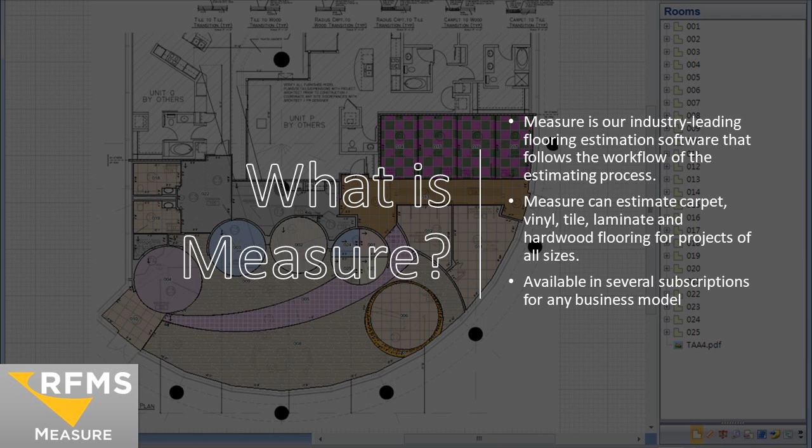If you're still doing hand takeoffs, the old-fashioned way, it gets it done, but the biggest thing with software is it makes it more productive and efficient. It's not necessarily designed to do it for less square feet or yards than you could do it by hand, but ultimately more productive and efficient, especially for any sort of changes that you'd have to do either on a builder side, homeowner side, commercial side, where they're replacing carpet broadloom areas with tile. That's why we feel it's time for people to make a change and kind of come into the 21st century, with a little pun intended.

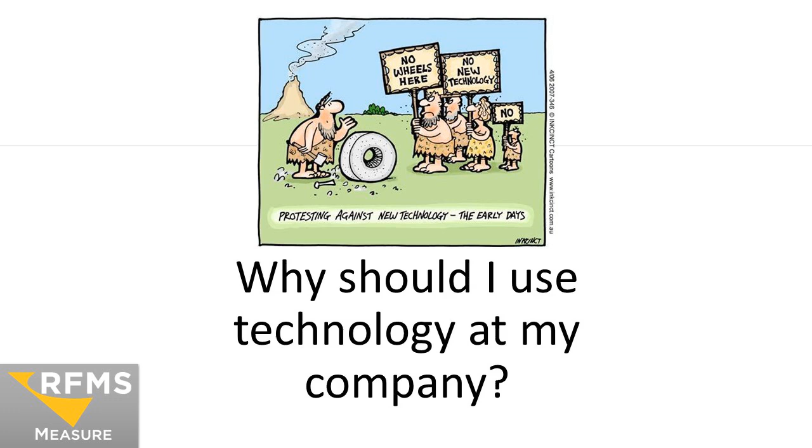Why should I use technology at my company? Well, it really makes it more productive and efficient, in my opinion. If I had to do takeoffs for a living again versus training people on how to do them, certainly I could go back and do them by hand, but I would certainly not be as productive or as efficient as some of my coworkers if they were using software. And I think our customers expect it. We live in a society now where technology has crept its way into everything from our homes to our cars, and it just makes sense business-wise and even estimating-wise to let that also be part of our day-to-day routine.

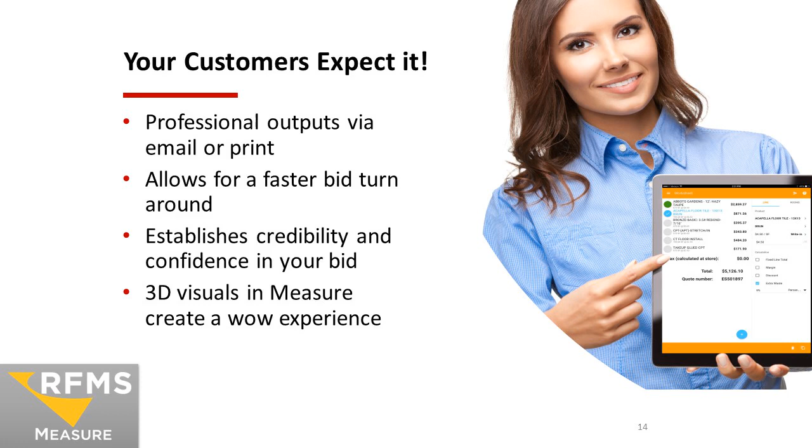Professional outputs allow for faster bid turnaround, establish credibility and confidence in your bid, and 3D visuals in Measure create kind of a wow experience, more of a sizzle, that could ultimately be used as a sales tool.

Your staff needs it. Technology allows your staff to do their jobs quickly and efficiently, grow your business without adding staff, and accommodate. As we mentioned before, hopefully this is going to make you more productive and efficient in the takeoff process. Takeoffs that used to take maybe a week for huge commercial jobs, even ones that took maybe 2 or 3 hours, you can certainly take that time down by using software. What new technology does is create new opportunities to do a job that customers want done.

Measure Premier is designed for commercial flooring dealers. It minimizes waste by optimally placing carpet seams and cuts. Keep in mind, you the user have control over those seam placements.

We have the ability to do built-in tile patterns for complex designs. It's a designer-driven market out there, both in commercial and residential. We can quickly calculate the biggest commercial takeoffs, precisely control all the details and complexity of projects, from any sundries, glues, transition pieces that you might need.

Define custom tile shapes and sizes - we're seeing a lot of rhombus tiles, parallelogram shaped tiles, hexagons, even triangles, kite-shaped tiles, especially with our European clients. Increase profits and more efficiently and accuracy on takeoffs. Deliver service where your competitors cannot match, and create 3D visuals for that wow factor your customers might need, or that final thing to push over the edge.

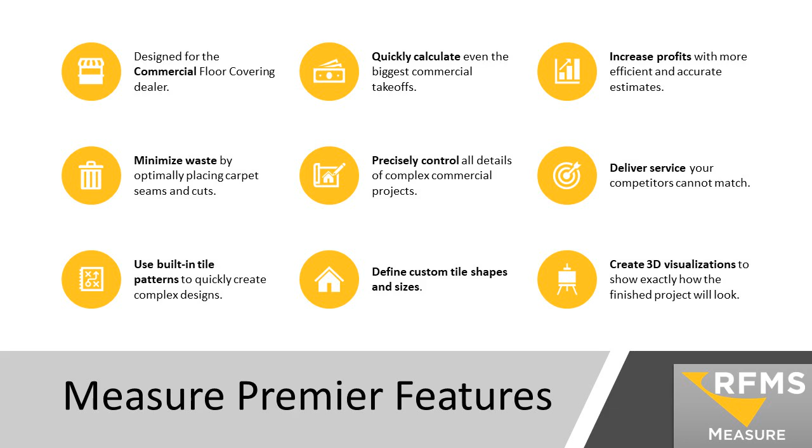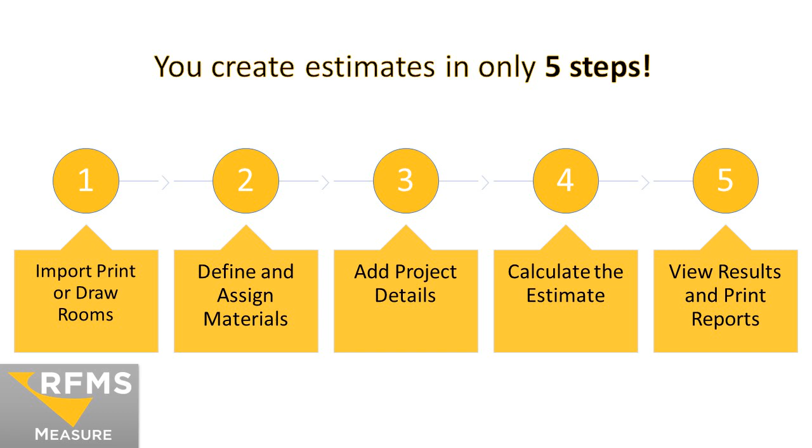Now you can create estimates essentially in 5 steps. We're importing drawings, from either a website, a builder, a GC, or an architect. We can define and assign those materials to Measure - we have a thing called the product list to define those materials. Add project details, such as does my carpet get base? And then calculate the estimates and view the results in prints and reports.

All right, let's see Measure in action.

So importing scales and blueprints - unfortunately I do not have the ability, we came into a little complication with screen sharing. I know RJ can on his. We could show some of this stuff at the end after the presentation if some people would like to see that. I do have a finished product we can share.

So, importing, scaling blueprints, setting up a product's list, drawing and editing the rooms, material allocation such as seamings, waste, and then finally our worksheet and our output for printing your job.

Measure works with all sorts of file types, from DWG, TIFF files, PDFs, JPEGs. We can select those to be imported in. We can work with multiple page documents, so if there's more than one page to a CAD or a PDF, we import those items in.

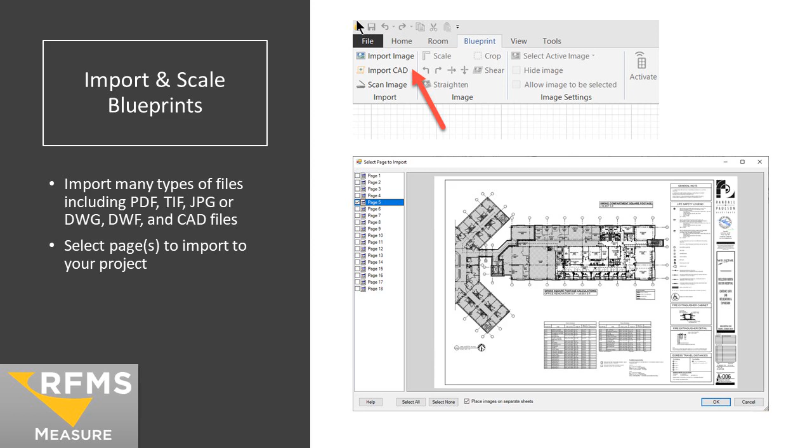Worldwide, the format is PDF from our clients in UK and also the Australasia region, Australia, New Zealand. Pretty much 90+% worldwide, people are dealing with PDFs, so it's not an issue importing any sort of things in. We can import multiple pages at once, and separate or combine PDFs into sheets or phases.

We can set scales, we can create a scale. So we have a blueprint that is not to scale, but we have dimensions. Sometimes you might have on a finished plan only a doorway that's a known size, a dishwasher, a tub deck - so you have to use some sort of known measurement if you don't have any dimensions, to create your own scale.

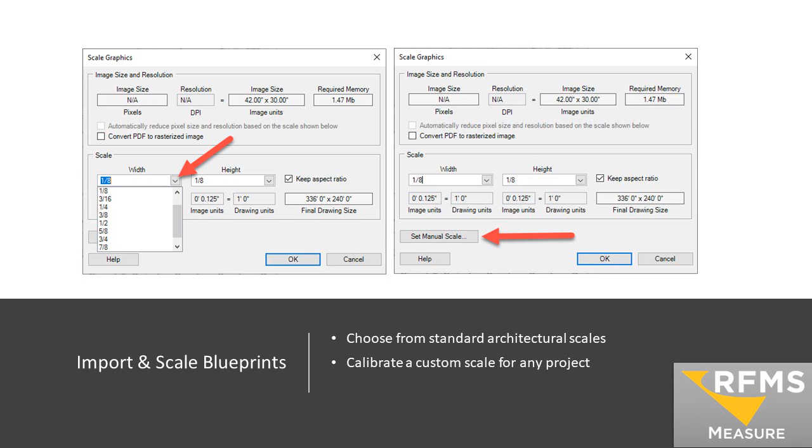Our product list - Measure has a whole product list to it. Consider it like a warehouse that you can bring products into, anything from carpet to tile to hardwood to resinous floors, slab materials like granite and marble.

The products can be imported directly into the product list, or imported from Excel or our business software, RFMS Core. Products contain the colors, the cost, units of measure, whether they come in a fixed quantity per box, pattern matches, roll sizes - not too much information we can't digest.

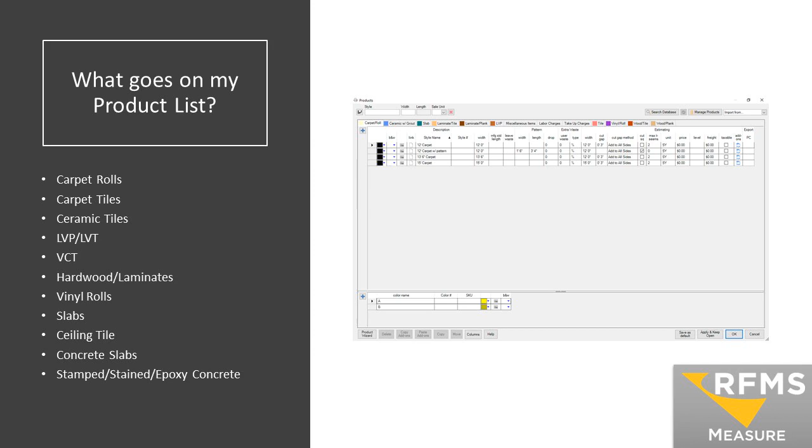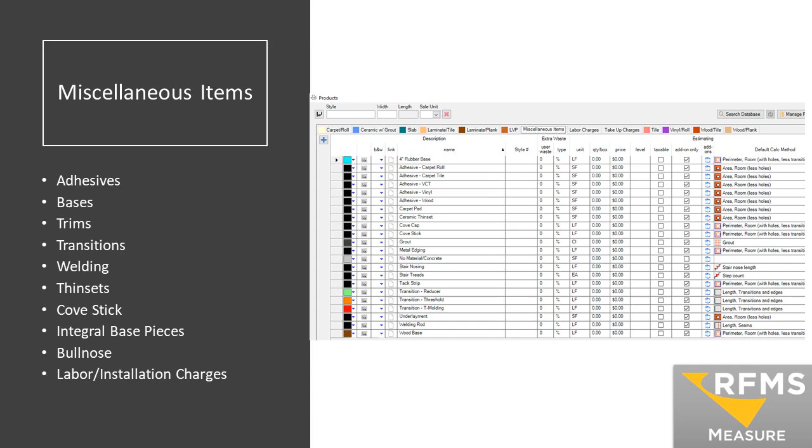You can even do wallpaper, as a matter of fact - kind of a dying art out there, but we can do that as well. Miscellaneous items, anything that's labor related, any sundries, adhesives, base, trims, welding rod, thin sets, cove stick, integral bases, bull nose - anything that needs to go with those materials and also be estimated can be handled in our products list.

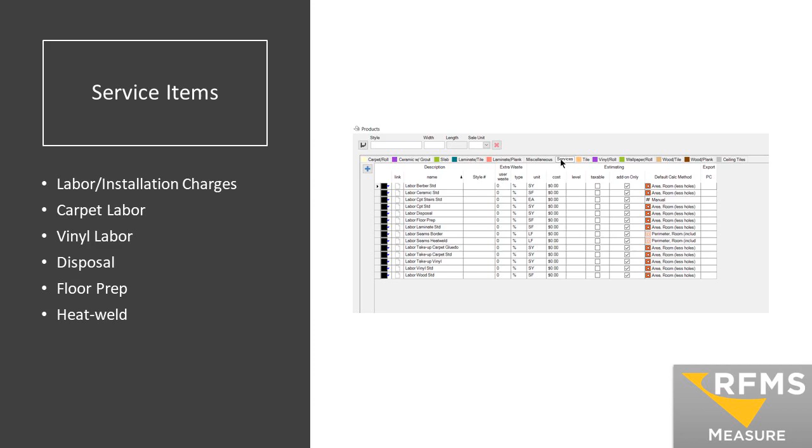Certainly any service items, and how those service items are calculated - we have different ways that we can calculate them depending on the material. So any sort of labor, vinyl labor, disposal, heat weld, setting up the cost and margins for all products, and that can be done.

Noting the calculation methods, different calculation methods that can be done with products.

Outside of the products list on our main screen, we have multiple tools for drawing. We've got quick rooms, or preset room shapes that you can put on your drawing and then resize based on need. You can draw rectangle rooms, L-shaped rooms, polygon tools, curved rooms, ellipses. There are also cutouts, designer-driven vinyl in commercial, cutouts and stamps to create the ultimate product finishes.

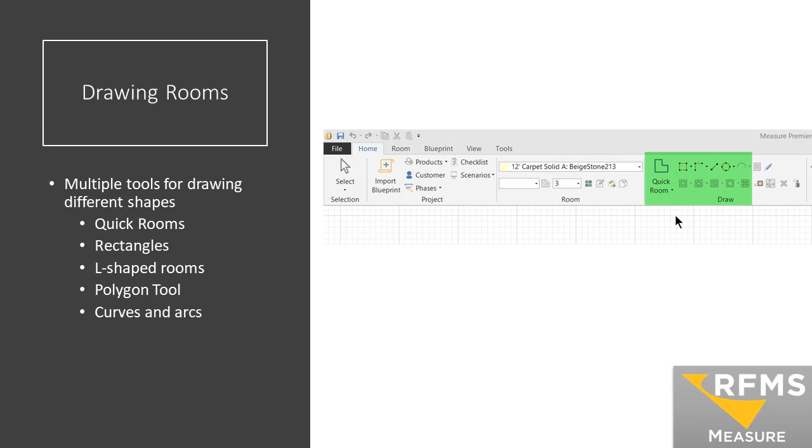Drawing and editing of rooms. You're seeing a screenshot of some rooms that have already been drawn on the machine. You can see the purple area and the beige area above it - that's where two materials come together. We've got some arcs and ellipses put into that particular room where the material has to be put together.

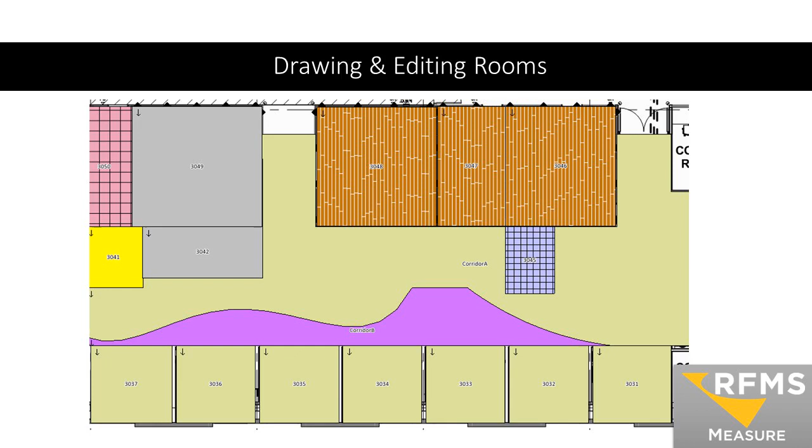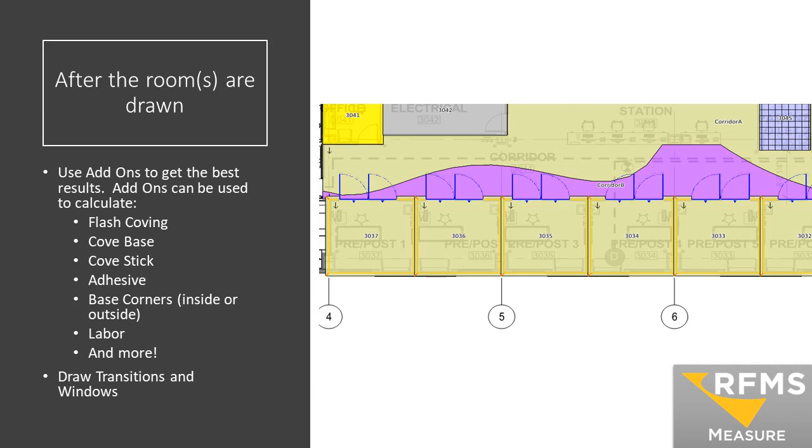We call them add-ons, which can be used in a particular room, from flash coving, cove base, cove stick, adhesive, base corners inside and outside, labor, drawing the windows and transitions, and more - anything that you're going to need to come up with.

Quick stairs is new - we've always had a stair tool, but we've added a new version called quick stairs, which are frequently used stair shapes and sizes. They can all be edited and resized. You can even create steps and add them to your quick stairs if you wanted to. Quick stairs gives people a quicker jump out of the blocks versus having to draw a set of spiral stairs from scratch.

We've got some presets, and you might need to change the width of the stair, the landing size, maybe the riser and tread dimensions, and so on.

Drawing and editing rooms - add-ons are being calculated as you draw them, so we have the ability to do what we call product add-ons. If I have a carpet and need to figure adhesive and base with that, I can attach it to the carpet, almost like bundling it. So wherever I draw with that material, it's also figuring up those additional items, be it base, adhesive, labor charges, or welding rod.

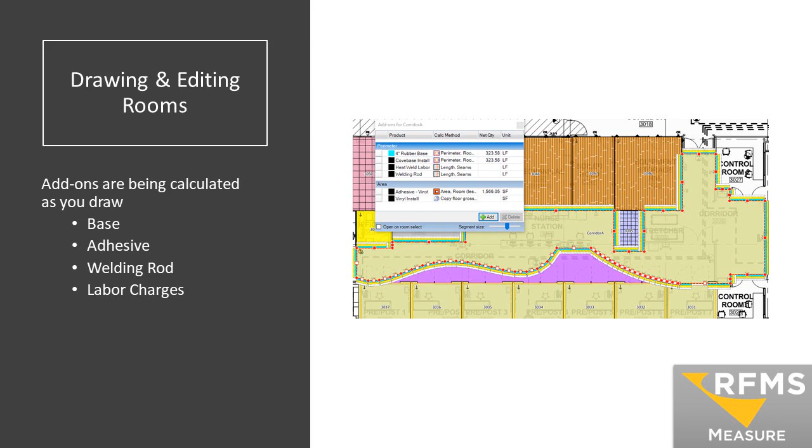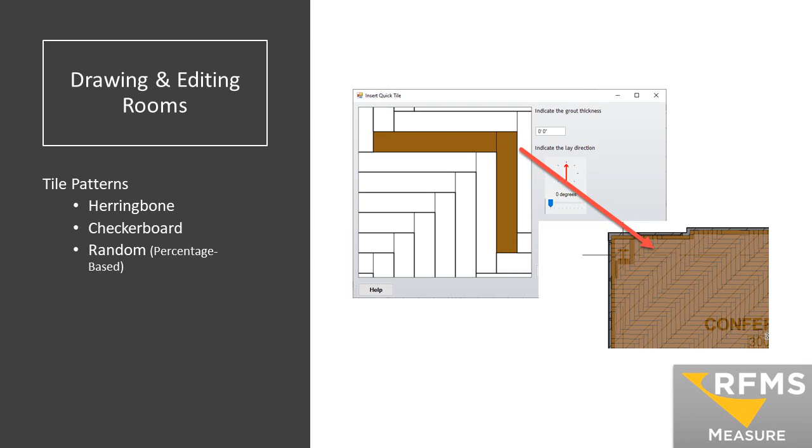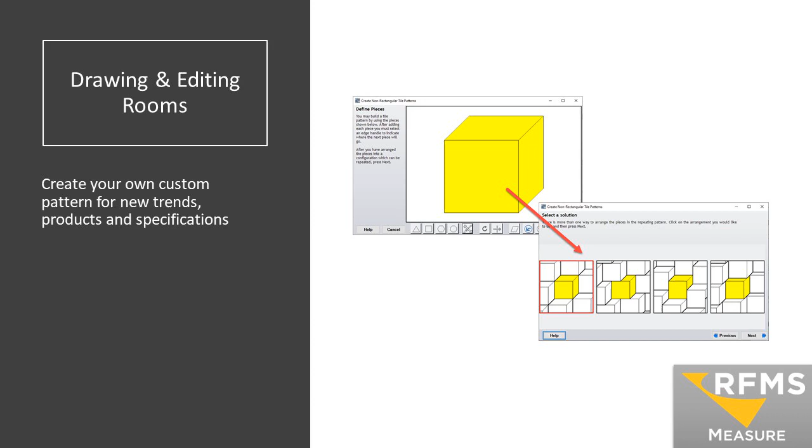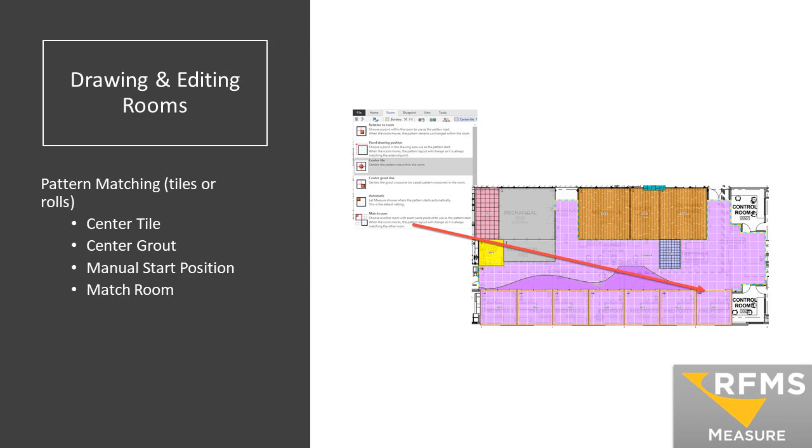Drawing and editing rooms also includes pattern matching, like tiles that need to match from a corridor to offices, or broadloom or roll vinyl, where we can center the grout line, use manual start positioning, meaning we've set a pattern start based on a desired point required by an architect. Or if I have a specific room set up and need to match it, with everything flowing off a corridor, and I have a broadloom job with a pattern match, all the offices need to flow off that particular corridor and not the other way around. We have the ability to capture that and come up with that in Measure.

We also have a way to create walls, or a tool that we call stacks. A stack could be something as simple as a 6-inch sanitary base that has to be applied to a group of rooms. I could create a stack with just 6 inches for one panel, or a stack can be multiple panels.

With the stacks tool comes the ability to put trim pieces in there. So if you had a piece of Dilex at the bottom for your base, then a piece of trim on top, an area of wall tile, listello, more wall tile, bullnose, we have the ability to control the height of the panel and the trim pieces on it, and actually save it to a stacks library so that if you have several rooms to apply that stack to, you don't have to recreate that wall configuration each time.

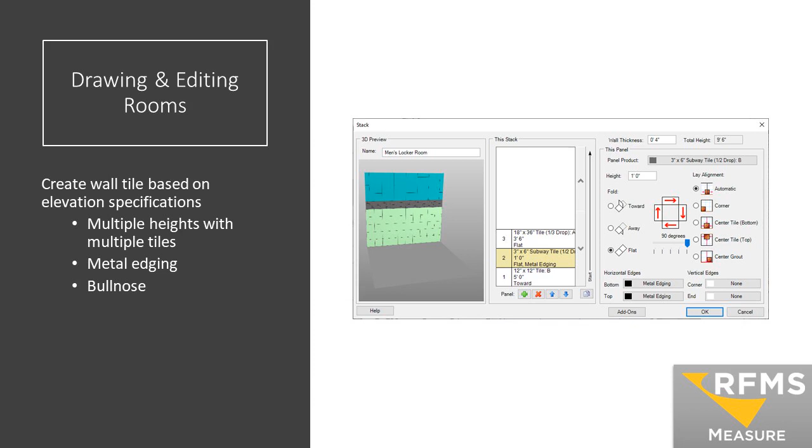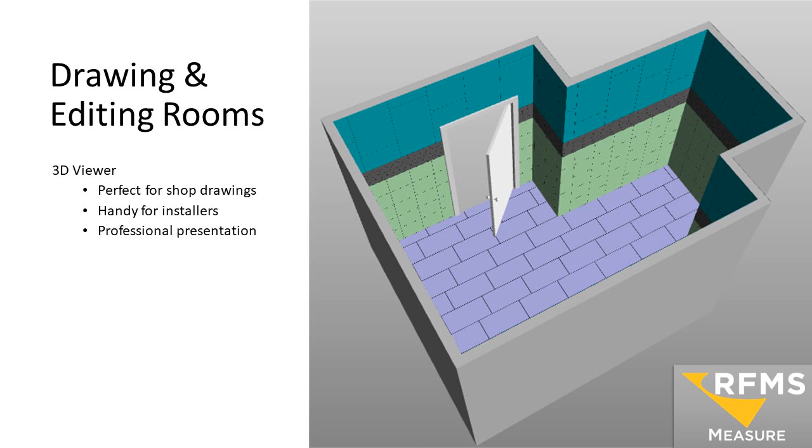We give you how it looks in 3D, either with wall thicknesses or without. These are handy drawings that could be printed out in a PDF with dimensions for an installer, or for presentation purposes or submittals for your customer. So we do have a way to do that as well.

Material allocation - you have the ability, although Measure will go ahead, if you have a 12-foot material or a 6-foot material, it's going to assign seams in given rooms. But ultimately you, the estimator or salesperson, have control over where seams are being placed. Measure is spitting out a math equation; it's up to you to choose the best layout and the best place for seams to maximize material and minimize waste.

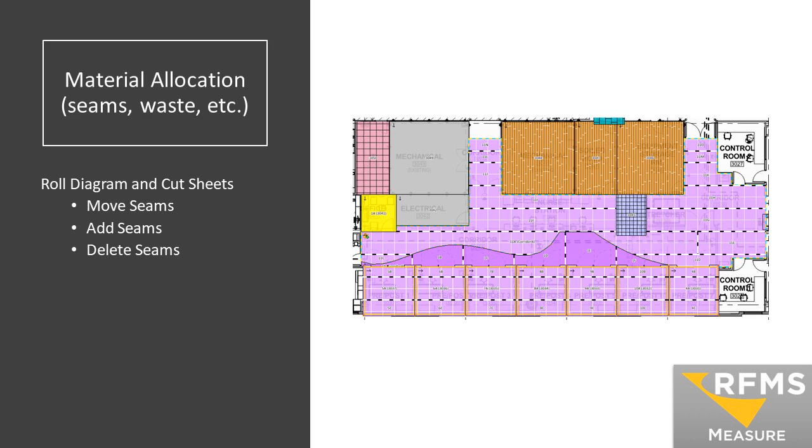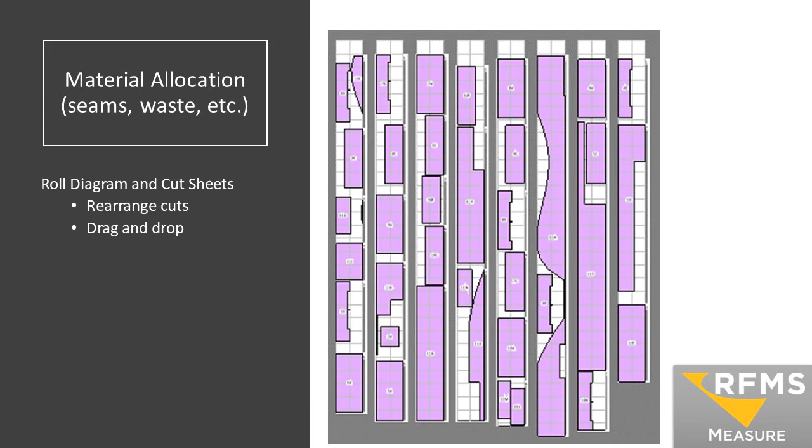We have all the tools for moving seams, adding and deleting seams to accomplish that. With material allocation, you can see where the seams are and how those rolls are being cut off a given roll, with different settings in our products list affecting how cuts are laid out, such as extra cutting tolerances and so on. You can rearrange pieces manually by dragging and dropping items on the cut sheets. There are also different allocation settings in Measure options that try to minimize waste areas, but ultimately it comes back to the user trying to get the best layout they can.

Material allocation from seam and waste - we get the number of rolls needed, waste percentages based on the layout itself, and the overall length needed on a specific roll good.

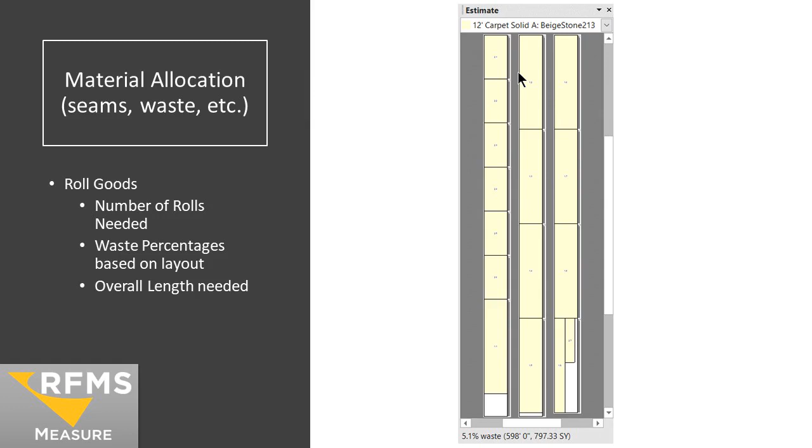Hi David, this is Trevor, can you hear me? I can. Could you refresh your page, please? Your audio sounds a little bit modulated. Just refresh the web page itself. That would be great, thank you. Okay.

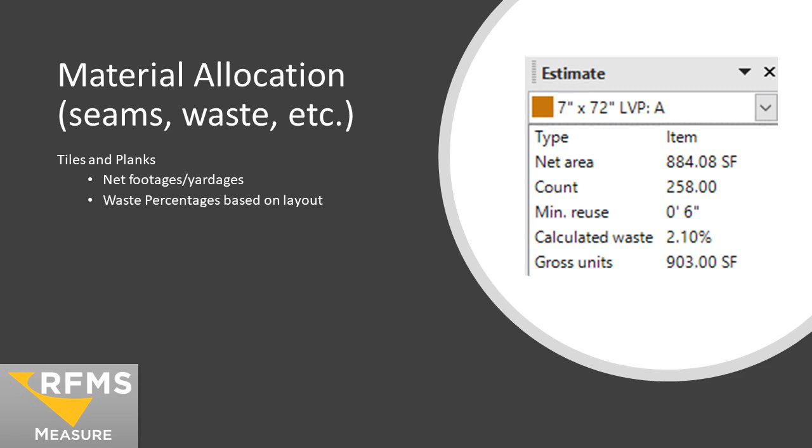All right, material allocations with seam waste, etc. You can do addendums in Measure. So let's say you had a layout and they wanted an addendum, either a change, a change order, or alternate pricing. Okay, where I want a carpet tile number, a broadloom number, or we would like broadloom in these areas with an option to go hardwood. So either addendum changes, a flat change order, or alternatives, we have the ability to do in Measure as well.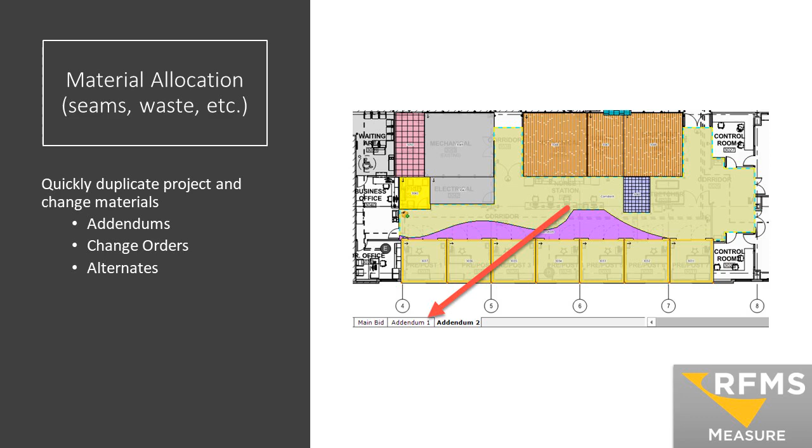Worksheet and printing, we do have a worksheet in Measure, and that's Excel-based, although it's not Excel. The white areas that you see are the only areas that you can actually edit and input information in. But what that worksheet is doing is spitting out your numbers for a job.

I've always felt that the worksheet, from an estimating standpoint, when I look at it as an estimator and it's a cost to me in my company and it has to leave our warehouse or get on somebody's truck, I should have it accounted for on this worksheet. That way I know I have everything accounted for on the job and I'm not taking any shortcuts or trying to handle something on the back end. If you're really using Measure efficiently, your worksheet should be a snapshot of your job, right?

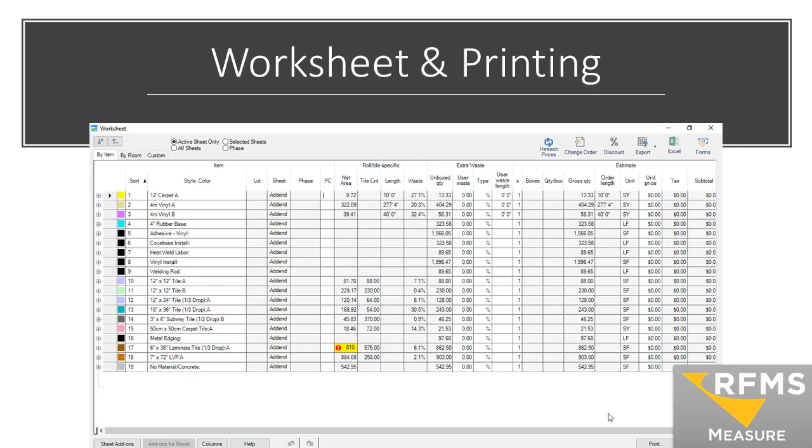Now, Measure does have different forms, because the worksheet itself, when you go to print it, you're only limited on the columns that can show. So we created an area in Measure called Forms that lets you go in and customize areas from the worksheet to create a presentation that you want to show a customer.

So, am I showing a price, and am I showing, like, add-ons, which would show the add-ons on a job, like a base or adhesive? Do I want to show those add-ons under the material? Would I rather hide the add-ons, which would lump the pricing into the main material? Do I want to show or hide the rooms, show prices, show only grand totals or material prices?

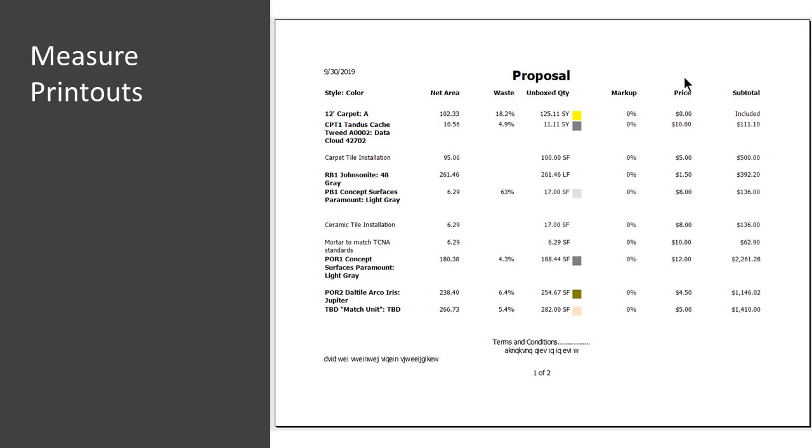There's also another form that's more of a formal proposal that has lines on it and everything. Looks more like an Excel sheet. So you can have a blank one like this. And then within these printouts, you can actually create templates so that I don't have to reformat it every time I'm going into Forms. I pick the template that I want for pricing or to send my proposal to, and it automatically fills out the way we had it.

Why should I choose Measure? Well, Measure Desktop was first launched in 2005. 11 US-based Measure exclusive developers, 6 US-based Measure exclusive help desk agents, 4 Measure exclusive trainers, integration with RFMS and QuickBooks, as well as Excel export to work for any company, and multiple platforms of the version that fits your company's needs. So whether in Measure Desktop, Premier, or Standard, or a combination of both, we can mix and match things to fit your ultimate business needs.

Speaking of versions, Measure Mobile is a version that can be used as a companion piece to Premiere. So let's say I'm a Premiere user, I've imported a blueprint and done my takeoff. That bid's been awarded. Before we go do some field measuring, I could take that job created in Measure Premiere, open it up in Measure Mobile, take my iPad out in the field, and verify measurements based off the original takeoff in Premiere.

Or possibly I've done a takeoff in Premiere and I have a salesperson with an addendum. I'm tied up with a new bid. Well, that salesperson could open up the same job I did in Premiere and view the blueprint.